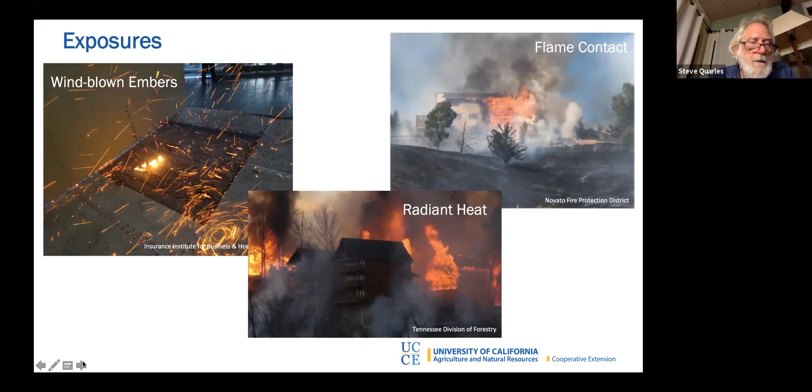They're important because of what they do directly and what they do indirectly. As Carly indicated, I'm retired from the Insurance Institute for Business and Home Safety, and I worked for 8 years or so at the research center in Richburg, South Carolina. So a lot of what I learned is from that experience, and a lot of my visuals are from there. This is one example.

The upper left-hand picture is from the research center, from the test chamber. It's a large wind tunnel facility. You can put full-size buildings in it. IBHS conducts research on the built environment to better understand the impact of natural hazards that have a wind component to it. So it's a large wind tunnel: hurricane, hail, wind-driven rain, and wildfire.

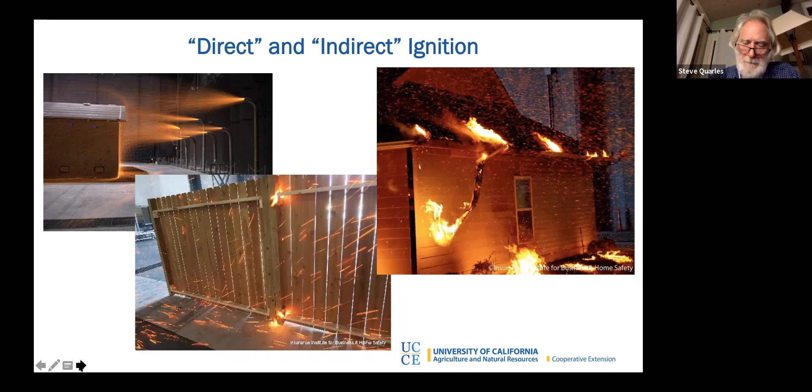I think we've come to learn over the years that homes and buildings survive wildfire most successfully if a coupled approach is taken. The coupled approach means that you take care of things on the property and you take care of things on the home itself.

But you can imagine that if all of that greenery were not there at all, sort of perfect in a manner of speaking from a lack of combustible things, embers can fly over. Embers can fly upwards half a mile, reported much more than a mile. But to have enough embers and enough embers of a given size and energy, you're talking half a mile or a quarter mile anyway, bigger than the property of most people that I know. So embers can land on or near the home, and that home still has to resist the embers.

So there's a lot of ember concerns for the home, and the purpose of what you do on the property is called creating your defensible space. It's also called the home ignition zone. There's a lot of things it's called, but really it's how you select, locate, and maintain vegetation and other combustibles on the property. Other combustibles would be a tool shed, a wood pile, your RV, anything that can burn. You want to make sure that should those ignite, they're not going to have a negative impact on your home.

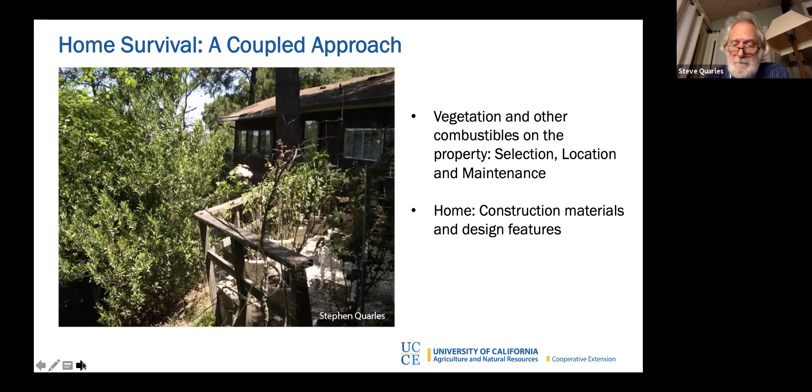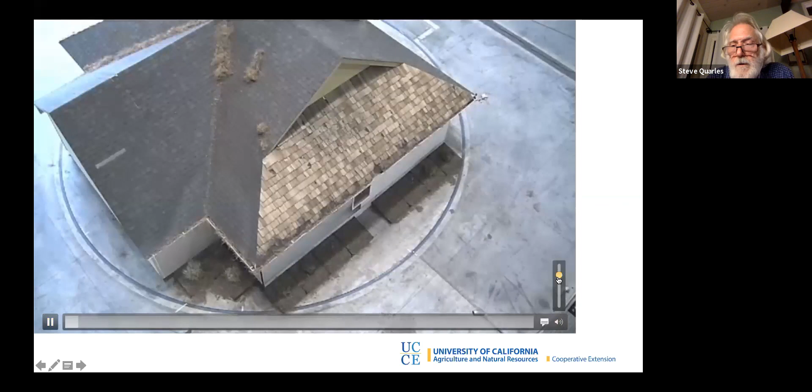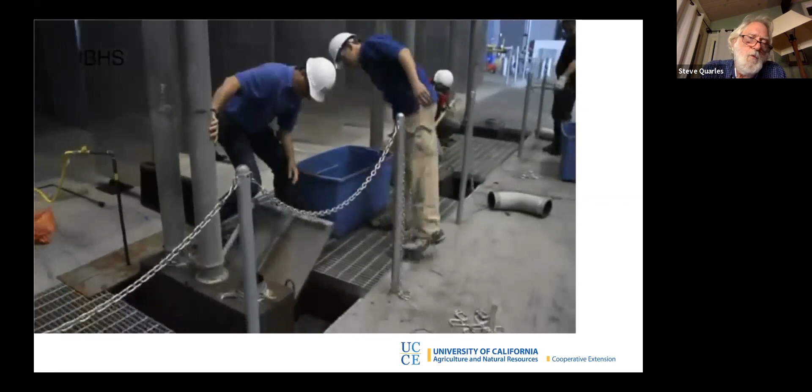So this coupled approach, I think, is pretty important. I'm going to show you a quick video, make sure to take the sound down. This was a 2011 demonstration using our first generation ember generators. It was rather a batch process. We now have more continuous feed generators, so they can run for much longer.

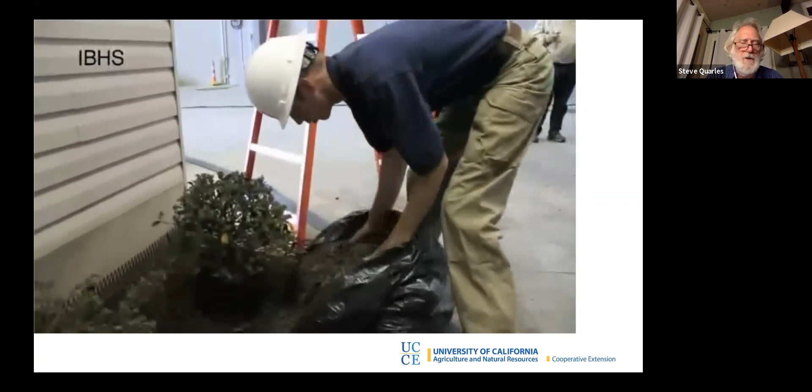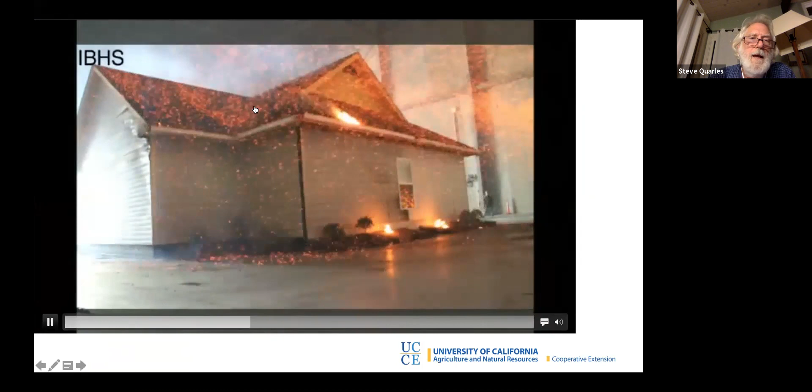In this particular test, we are using common construction materials and common things that might be located near the home. Here's the generators working. You can see embers accumulating on the screen on this window. You're going to start seeing ignition of bark mulch on the ground, pine needle debris in the gutter, and there will be ignition of debris in the valley.

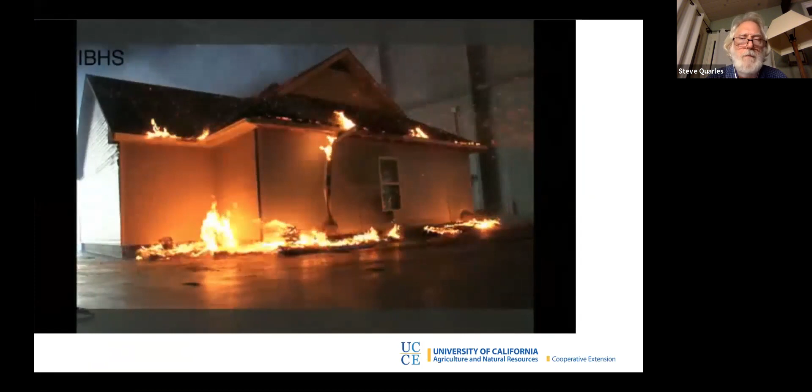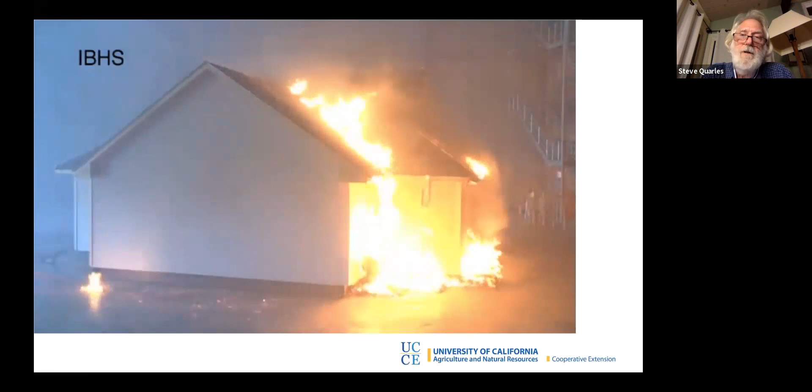You can see the vinyl gutter detaching and falling to the ground, sort of becoming a what's-on-the-ground problem. The metal gutter that was on the right-hand side stays put, and it remains an edge-of-roof vulnerability or threat. You can see the debris in the valley burning.

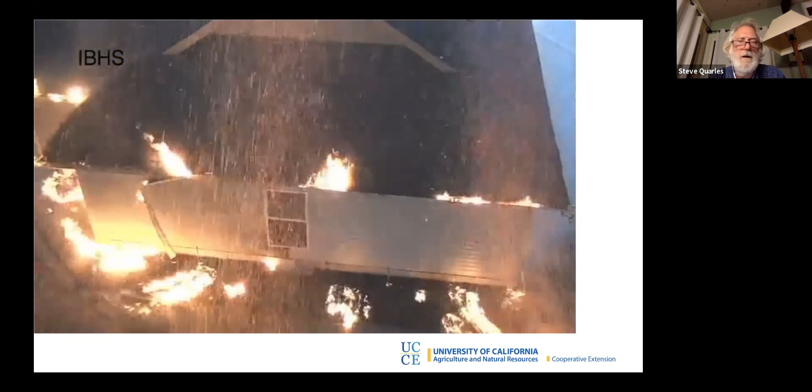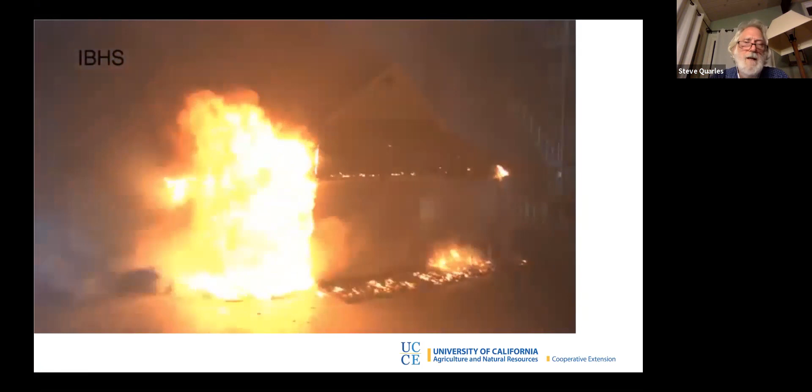Again, another shot of the detached vinyl gutter. The re-entrant corner got a pretty big fire going there. That's what made us extinguish this particular fire — we wanted to maintain and save the house.

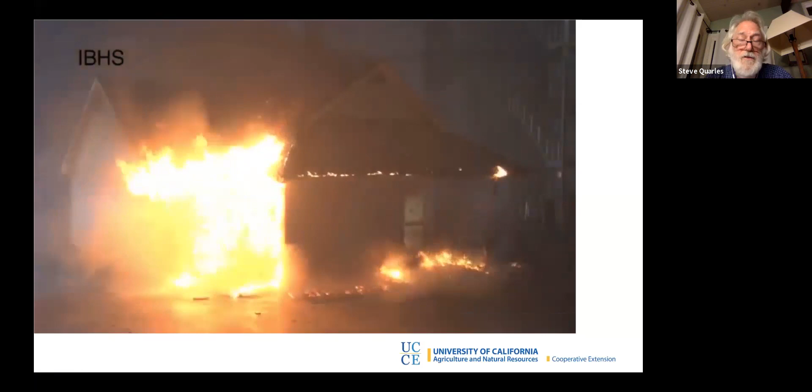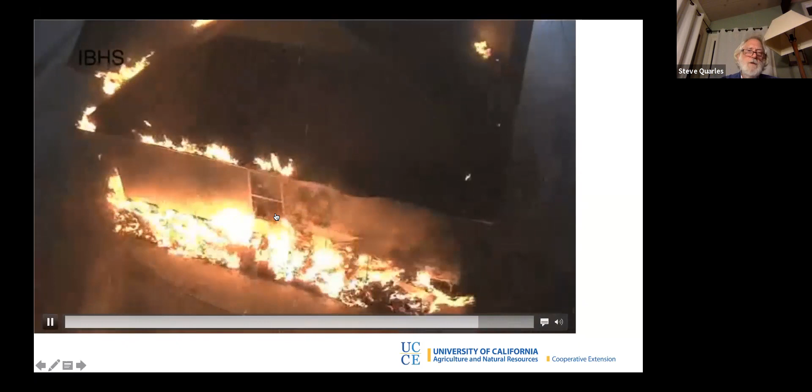But in any event, you see what embers do, and you saw a lot of examples of indirect ember ignition. You can see this is a plastic-clad fiberglass screen in the window. It really did a good job of keeping embers out of the interior of the building.

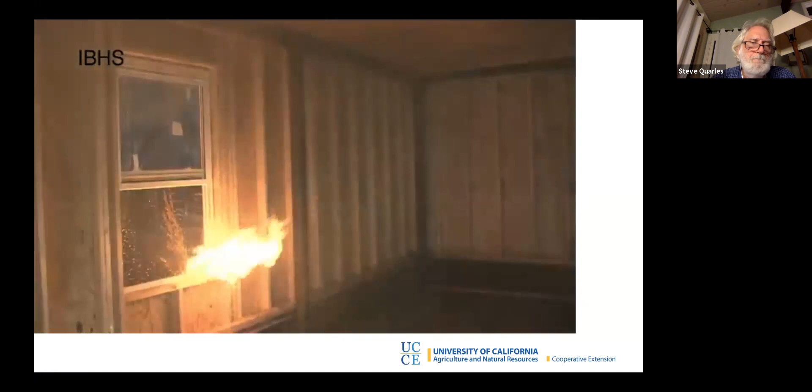We left the window open on purpose, but once flames touched this window screen, the screen failed and flames and embers could then enter. So you saw some examples there of what embers can do.

I'm not going to spend a lot of time on this defensible space component, except to talk about this ember-resistant zone, this near-home zone. You've maybe heard it called the non-combustible zone, the low combustible zone, the ember-resistant zone, zone 0 — Firewise calls it the immediate zone. It's the zone right next to the house, nominally a 5-foot zone, and it includes under the footprint of any attached deck.

The idea here is that because of the importance of the ember and the ability of windblown embers to fly over any defensible space or any property that most people have control over, you minimize the opportunity for embers to ignite the home if you have non-combustible areas right next to the home.

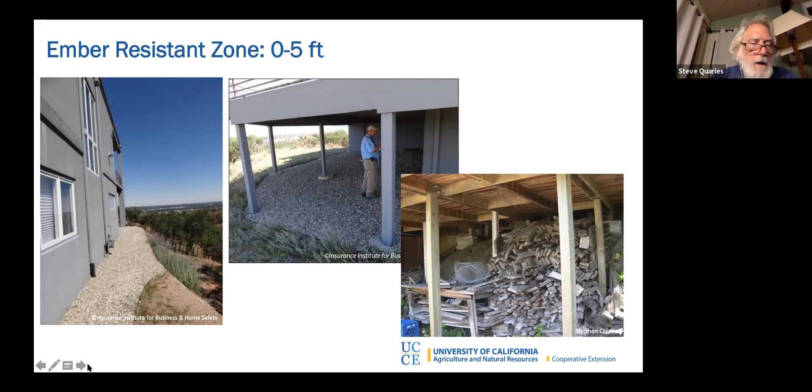In part and parcel with this horizontal zone next to the house, we need to make sure we have this vertical zone between the ground and the start of the siding. You want an area so that embers that land and stay put at this ground-to-exterior-wall intersection don't have anything to ignite there.

We recommend 6 inches because it's a more conservative number, and it allows for a certain amount of combustibles to accumulate there, or some ground cover in proximity. So the 6 inches is the guidance, but if it's only worrying about embers, less than that works—but we have to realize there are sometimes other things that can accumulate there over time.

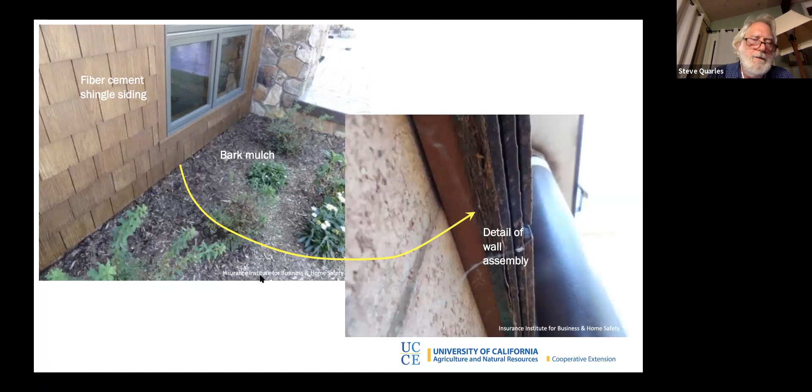There are times when radiant heat or flame contact is definitely more important—these are neighborhoods with close home-to-home spacing. A good example of this was the Tubbs Fire in Coffey Park, Santa Rosa, 2017. The amount of loss from this was in large part from home-to-home radiant heat or flame contact, because the high winds pushed burning buildings into adjacent buildings. So these are examples where materials are much more important.

Often... I lost my train of thought there. We'll just move on.

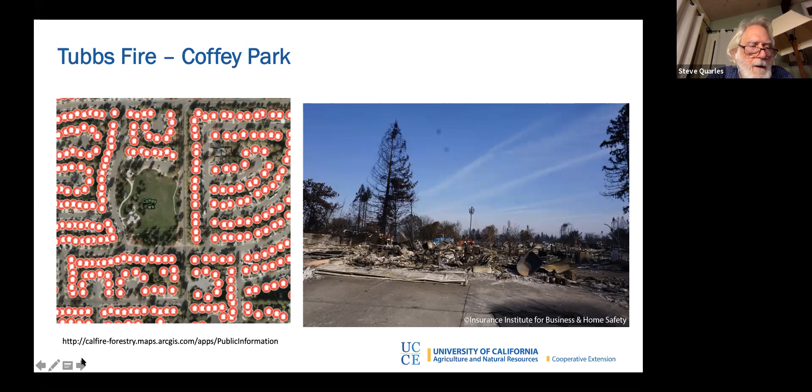This is often an issue when neighboring homes are nearby. We'll talk about some of the things we can do for this during the course of this presentation.

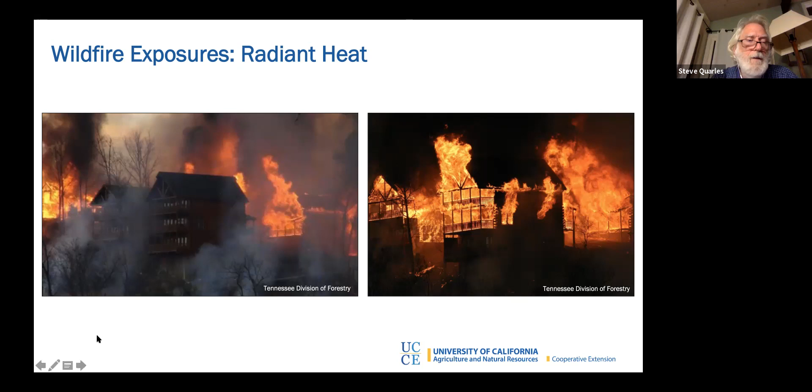When you think about homes you might be designing or building, it's useful to think about where the home is on the parcel and what's near it. If you're building on a large lot, it's all about the ember, as long as you have really good defensible space and can take steps so fire can't burn to the building, or the burning thing isn't close enough that radiant heat from it is sufficient to break glass in the window, for example.

If you're on a steep slope, then vegetation management becomes a pretty important thing. Downslope, you might want to do things to harden your deck or make it more resistant. We could talk about some of those things along the way.

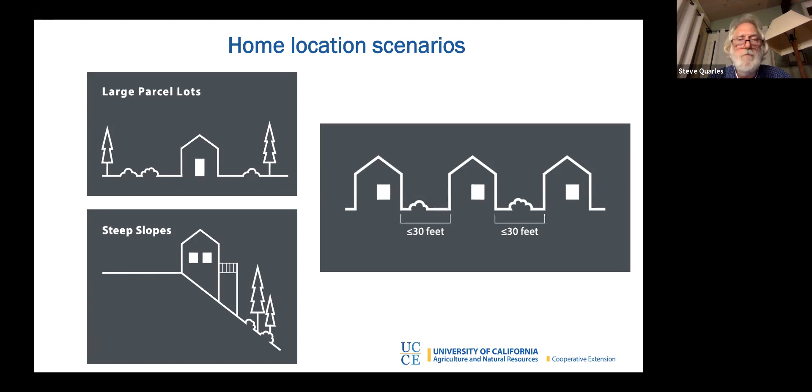If you're in a neighborhood where the neighboring home is pretty close, say within 30 or so feet, then non-combustible cladding is important, and dual pane tempered glass becomes much more important. You can also consider things like a deployable shutter for the window, or a fancier flame and ember resistant vent. So depending on your situation, you can think about how to use different strategies to provide additional protection for the home you're working on.

So I think we're going to take just a few minutes now to review some of the terms used to describe the fire performance of a material or a wall. We have non-combustible materials—there's a standard test for that—which are things that don't readily ignite. And then we have a lot of combustible things.

When we're talking about combustible things, there are different terms or tests used to describe their performance. There's the flame spread index, class A, B, or C. There's ignition-resistant material, which is about the material versus the construction—construction being more of a generic term. I'll show you some pictures of these tests in a minute.

There are some standard test methods that California has adopted through the State Fire Marshal's Office. Most of these are now State Fire Marshal standards, and many of them are ASTM standards also. These are ways that combustible materials can comply in the state.

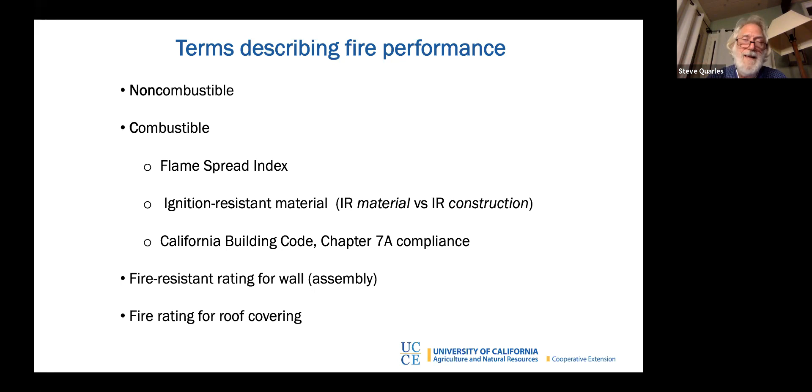Then there's fire resistant ratings for walls—like the 60-minute wall, the 20-minute window—with a particular test for that. And of course there's the roof fire rating for roof coverings, class A, B, or C again. So there's class A, B, or C for roofs, and class A, B, or C for flame spread—two different kinds of class A, B, and C. You just have to know which one you're talking about.

This is the Steiner tunnel, used in two ASTM tests. ASTM E84 is used to get the flame spread index. In this case, the material is located on top of the tunnel, and you monitor flame spread down the tunnel on the material. Depending on how far it goes, you get a flame spread index of A, B, or C, with A being the best. This test is 10 minutes long.

A 30-minute long test is used in ASTM E2768, which is used for the designation of an ignition-resistant material. It also has a prescribed distance down the tunnel that cannot be exceeded to still have that class A or ignition-resistant material designation. So the Steiner tunnel is used for two things: flame spread index and ignition-resistant material.

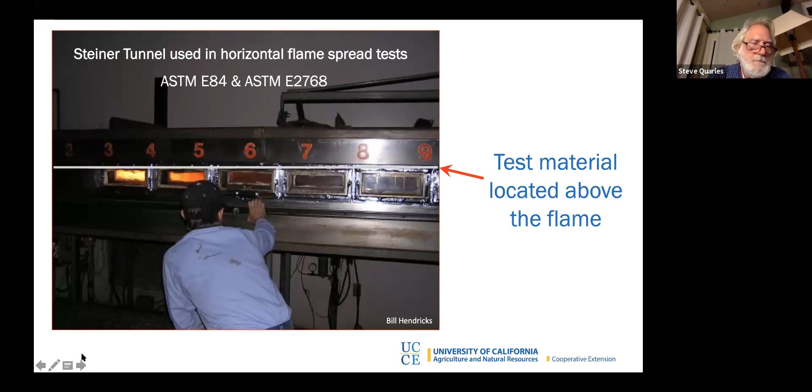If you want to know materials that comply with the state, you can go to the State Fire Marshal's Building Materials Listing Program. You'll come to a page like this and fill in the category you're interested in. I've picked, on the right-hand side, decking for wildland urban interface—decking products that comply with the state's test. You hit search and find products that comply.

You can do this for decking, for siding, for things that comply with the ignition-resistant material designation. That same test we saw before—in California Chapter 7A allows those materials to be used, so you can find out what works there. They also have a listing for vents that comply with their flame and ember resistant criteria.

The best way to get here is to do a web search: California Office of the State Fire Marshal Building Materials Listing Program. It'll be the first or second result in your search engine. It's a really convoluted URL, but that'll get you there.

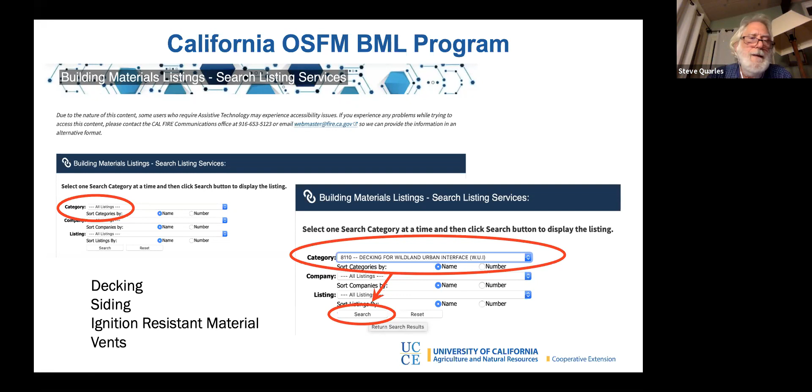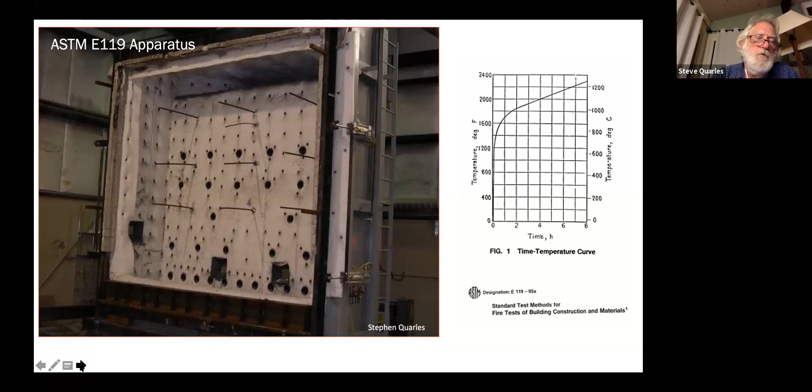If you've read the building codes, one half of the exterior part of a 1-hour wall is one way siding components can comply. This can be a horizontal furnace for floors, or for WUI, wildfire-related testing, but we are mostly interested in the wall part, this particular vertical furnace.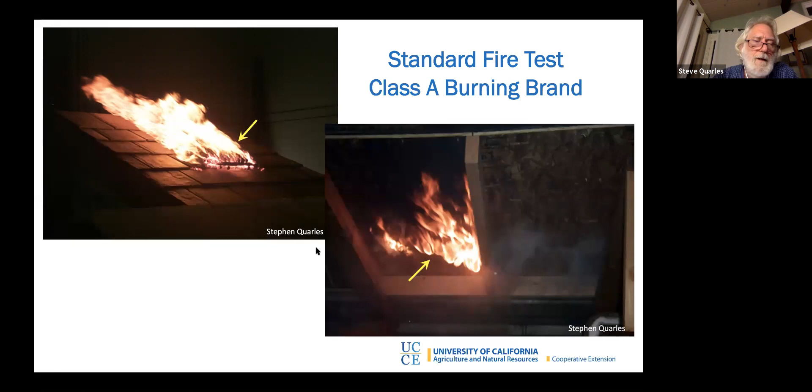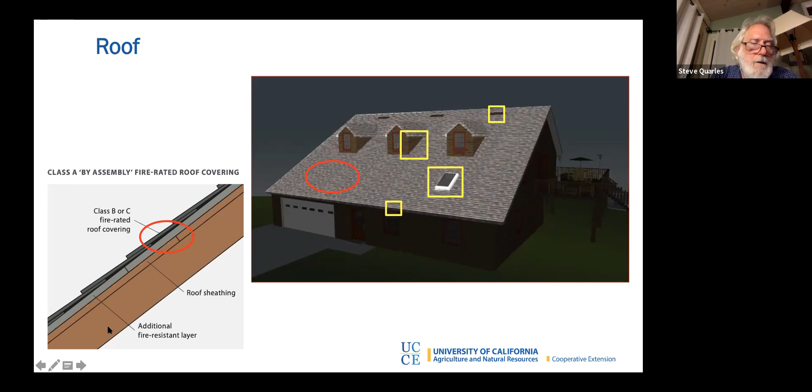The roof can be vulnerable at roof-to-other-component edges - at a dormer, a split level, a skylight, a vent, a gutter. The fire rating of the roof doesn't tell you about these things, about how the roof might perform there. So we're going to talk a little bit about that in the next minute or two.

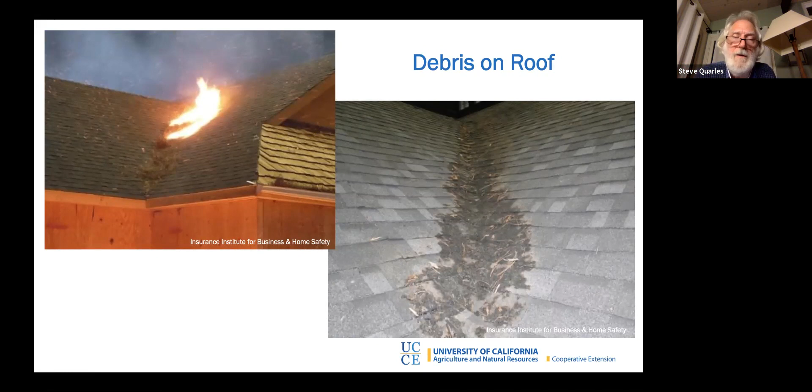In this situation, you have the siding that could be more vulnerable and this under-eave area that could also be vulnerable. You want to make sure both provide similar protection so the siding doesn't become the more vulnerable component. You probably know that at a roof to wall junction, siding can come pretty close to the roofing material because of what embers can do directly.

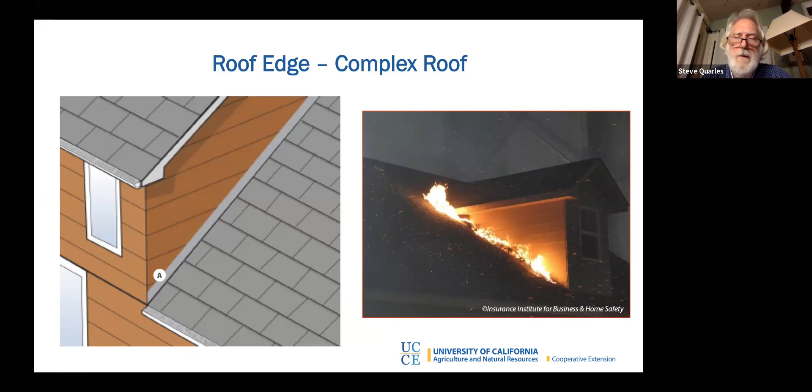It's a good idea to have a bigger separation between the roof and the start of the siding. You can do that by taking the siding off and/or using metal flashing. With this metal flashing detail, to avoid moisture-related degradation, you need to make sure the flashing tucks in behind the siding so water cascading down the wall goes over the top of the flashing and then off the roof. You don't want water to get in between the flashing and the siding, as that would result in moisture degradation problems you don't want.

I think this was a good idea. You can use any number of products, and non-combustible is probably better. You can use something like a mineral wool batt insulation product and stuff it in here. The idea is to plug these openings at the edge of the roof.

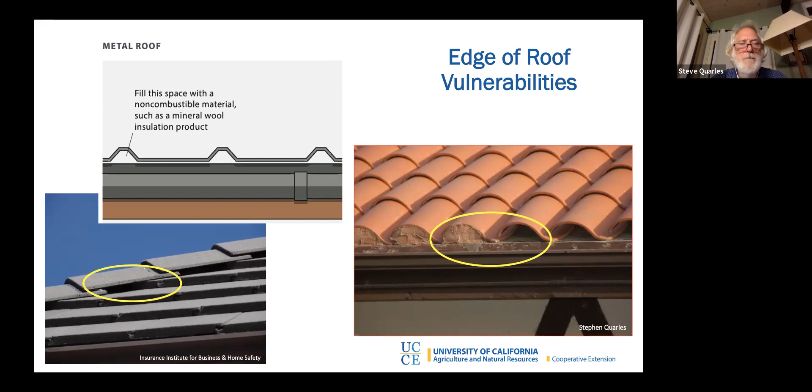So here's a gutter issue. Guidance right now and code in California is to have a gutter cover, and it's always better to have a non-combustible gutter cover. That gutter cover should be linked to a metal drip edge. This does a really good job of protecting the combustible components at the edge of the roof, at the drip edge, and the gutter cover should do a good job of keeping debris out of the gutter.

If you walk around and look, you'll note that some gutter covers just force debris to accumulate on top of the roof and back of the gutter cover. So from a homeowner perspective, it's not a maintenance-free scenario, but it should be a reduced maintenance job. I'd argue that a Class A fire-rated roof covering is in a much better position to resist debris that might ignite from embers on the roof itself, as opposed to in the gutter where flames impinge on the edge of the roof.

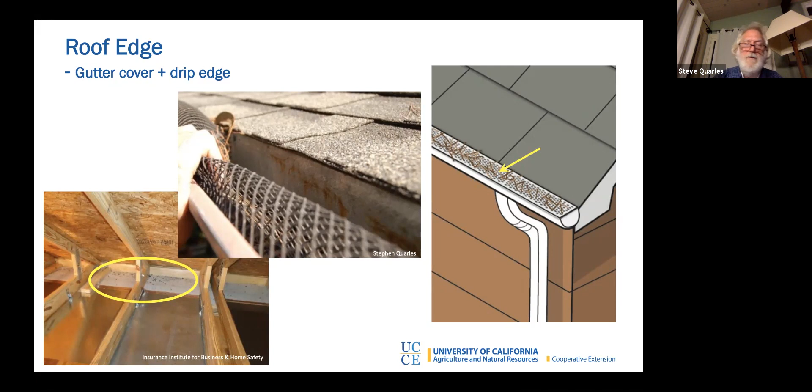The reason for having a non-combustible gutter cover is, as we see in this right-hand picture, debris can accumulate on top of the gutter cover. You don't want that to be a combustible material, so you want that gutter cover to be non-combustible. There are a number of options on the market these days.

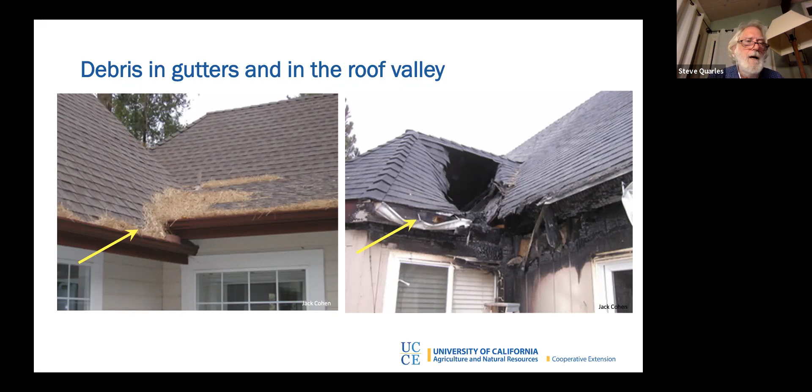So reasons for gutter cover and a drip edge.

If you have an operable or open skylight that opens, you'll have some screening in there. Guidance to the homeowner is to close windows when they evacuate, and the same would apply to an operable skylight. Make sure it's closed when evacuation occurs.

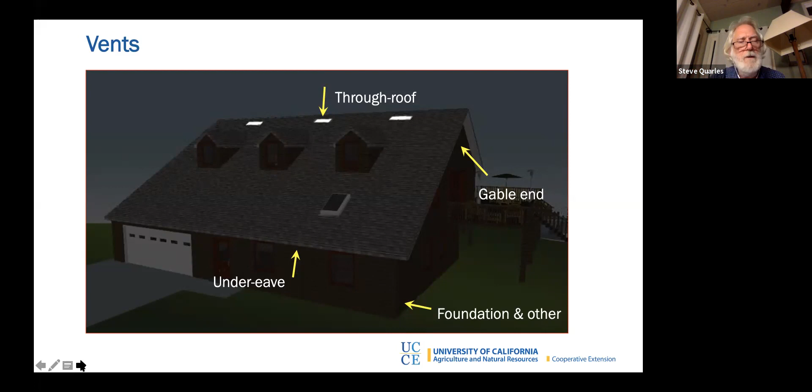The thing is, it's these finer fuels that are more readily ignited - it could be sawdust, it could be bird's nests, I've seen bird's nests in attics, it can be cardboard boxes of things. So we need to worry about these items, and we're going to talk about what vents are more or less vulnerable. What was very clear is that the gable end vent and the venting in open eave construction, vents that present a face perpendicular to the flow of air, are very vulnerable to the entry of embers into the attic space.

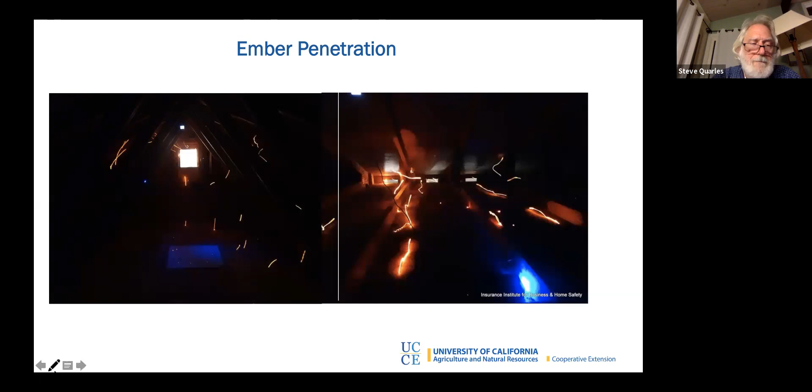So I'm going to show a quick video here and set it up a little bit. This is a camera inside the attic space looking across at the entry of embers into a gable end vent. You can see everything coming in. I'm using this to show you how mesh size can influence the number and size of embers that can enter. So let's just play this.

With 1/4 inch mesh, you can see embers coming in, passing from left to right. The number is large. The ember size has to be smaller than 1/4 inch because otherwise it'll just burn on the outside of the screen until it burns down to that size and then enters.

We're going to watch 1/4 inch for a little bit, and then we're going to watch 1/8 inch. Here's 1/8 inch - you'll notice that the number is reduced, and importantly, the size is reduced. But still, you have a chunk of them coming, and you would need more of them, maybe, in order to ignite something in there.

Attics are usually hot and dry places, so things in the attic become dry. Here we have 1/16 inch mesh, so even smaller openings, arguably fewer embers get through. You can see embers accumulating on the outside mesh, and they're going to burn down and then come in once they reach a size that allows them to enter.

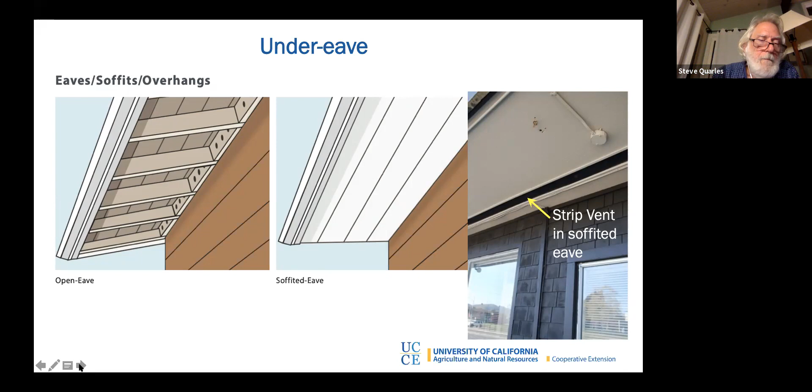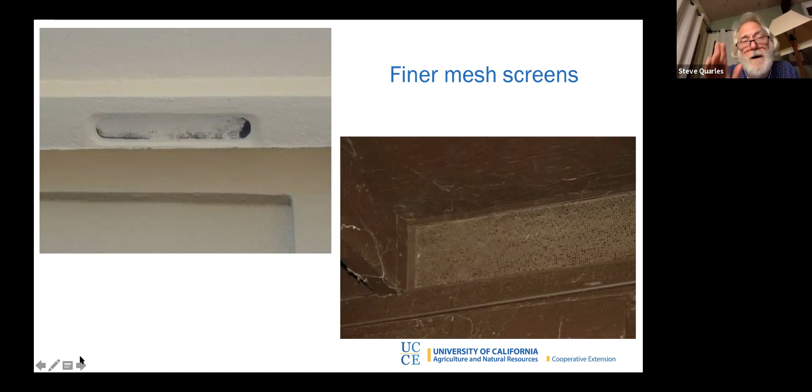So you have to be careful about this. The right-hand picture is an 1/8 inch mesh screen, which over time is easy to gunk over. This is just an awareness that the homeowner needs to have. From a wildfire perspective, you really want to go with finer mesh screen, but the homeowner needs to be ready to do a little bit more maintenance. You can also notice that this screen in the upper left needs repair because it's really detached, so it's not doing a job at all in keeping embers out or even small rodents out.

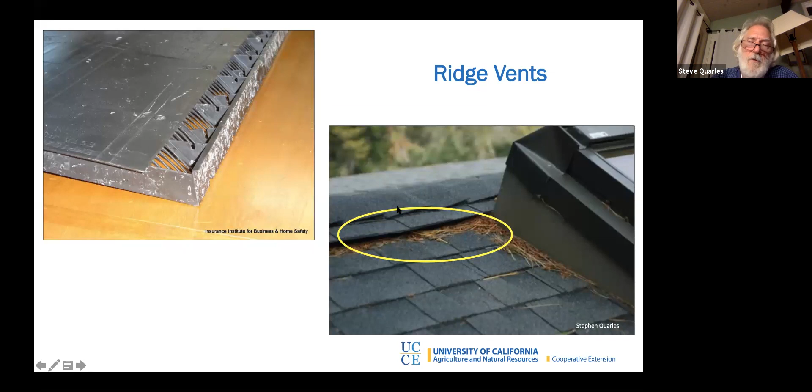We found that if you have a ridge vent, this exterior baffle does a really good job of minimizing the entry of embers. It's plastic, so it's not really a good thing to have on the roof, and we see the example of why not in this lower right-hand picture. Debris will accumulate at the entrance, embers will ignite, and then you have flaming exposure to this plastic vent. There are metal ridge vents that have this exterior, external baffle. This was a good performer from an ember exclusion perspective, but because of this debris accumulation potential, if you want to go the route of a ridge vent, you should go the route of a metal one, a non-combustible one.

There are a number of flame and ember resistant vents that are approved by the state of California. There's an ASTM standard test method that these vents must comply with, and you can go to that building materials listing page on the State Fire Marshal's website to see which vents currently comply. There are four vents that are currently commercially available in the state.

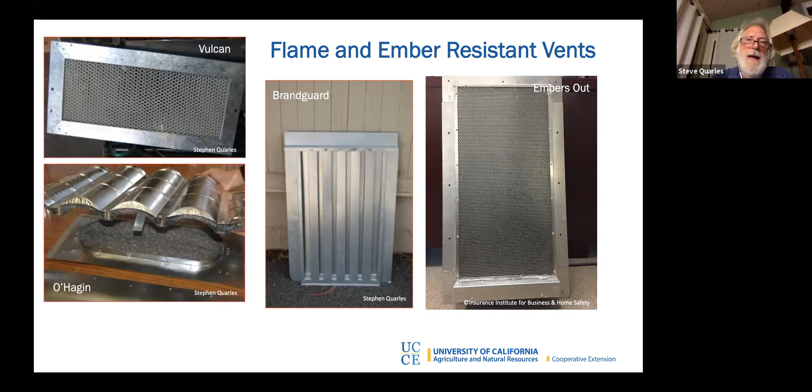These are the options that are there. These are far more expensive than 1/8 inch mesh screening, so this is something you'll need to evaluate. But there are certain situations where flame and ember resistant vents are really useful.

There are also unvented designs out there, and you get around the need for a vent altogether. You can do this for a crawl space or for an attic space. You need to check with the local jurisdiction to make sure they're copacetic with an unvented design, but this is definitely an option.

It's easier, I think, to do with new construction. If you're retrofitting existing, there's a lot of penetrations that might be hard to get to between the living space and the attic space, for example. That might allow moisture to get into the attic space with no way to get out. So if you're doing a retrofit, you need to be pretty careful. And because of ice damming issues, sometimes you have a harder time getting approval or using this kind of design in colder climates.

But it is an option. You want to make sure that the roof covering you have isn't going to be negatively influenced by having the foam so close to the roof covering. When you go to this unvented design, you're moving the thermal barrier from the ceiling to the roof, or in this case, to the under roof area. And so that foam insulation that is good for air barrier purposes, you don't really want it to have a negative impact on the fire performance of the roof.

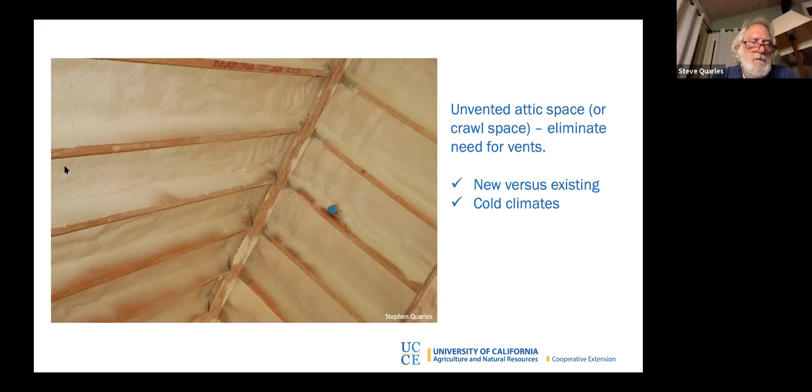The California way to comply with that state fire marshal standard and the ASTM accompanying standard, it's strictly a fire penetration standard or compliance pathway. You can have a lot of flame spread on the wall as long as fire doesn't penetrate through a lap joint. You can be good to go. So this is something to be aware of.

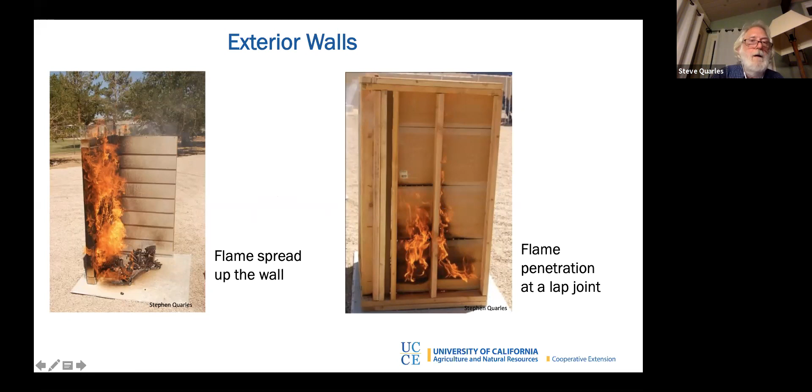This applies only to combustible cladding. I think that fiber cement often uses a plain bevel lap joint design. And this vulnerability of the lap joint doesn't really apply to a fiber cement product. It resists the penetration at the lap joint pretty well.

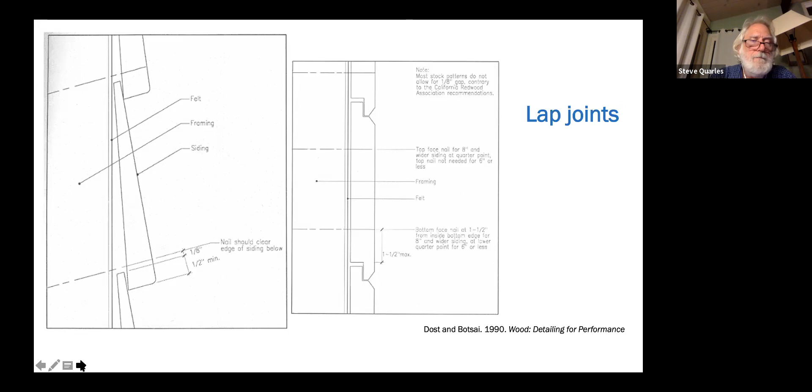A lot of us, I think, people tend to think that good siding is the only thing you really need to have. And whereas there are definitely situations where non-combustible siding is really beneficial, we talked about some of those situations earlier, but as you can see here, it isn't everything.

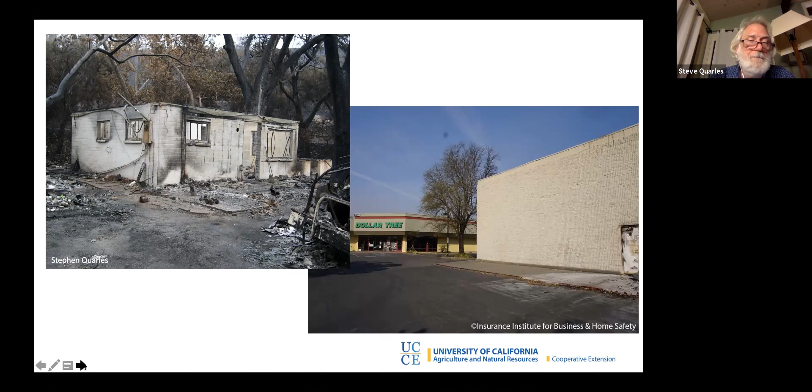So sometimes the glass broke. They did this test a few times, and sometimes the glass broke, sometimes not. But in each case, it was a single pane, non-tempered window.

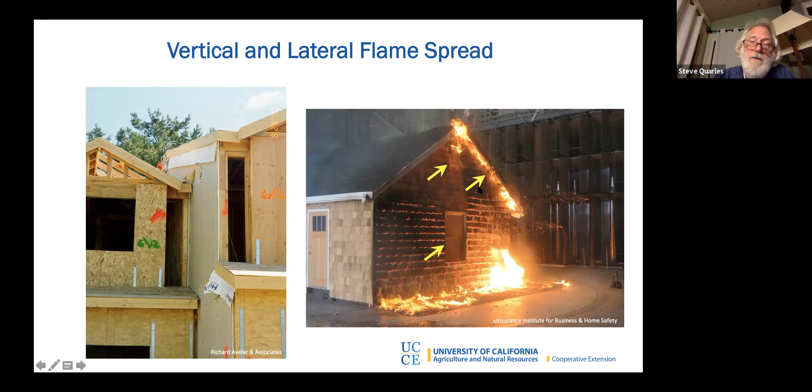I think the thing is that when siding ignites, this is another reason for this non-combustible zone, or near non-combustible zone, near the home. Because when siding ignites, it just becomes a problem for the home, and it's really difficult to have that home survive, just because there are so many potential weak links that you need to address. Whether or not fire penetrates at the siding itself, you have these other things that can be weak links.

This is just a study that I did with some colleagues several years ago when I was with the University of California. It shows that in addition to open eave construction being more vulnerable to ember entry, because of this boxed-in feature you have with blocking and blocking joist roof sheathing cavities that are built, you have much faster ignition and much quicker lateral flame spread with an open eave design compared to a soffited eave design.

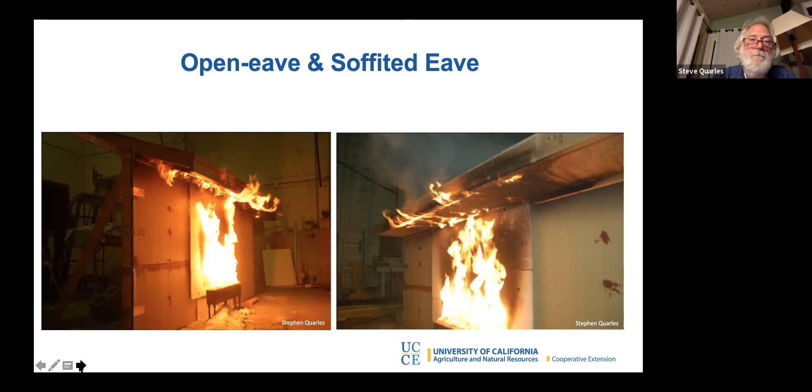So there's a couple of reasons to opt for soffited eave, but really you need to be doing what you can to stop that wall from igniting at all, because of what we've just been talking about. So we did talk a little bit about this with the question earlier in terms of coating.

This was a spray-on coating for a roof, a wood-shake roof, but I think it applies to other kinds of paint coatings also, the question. Often these are intumescent coatings, coatings that when they get hot, either from radiant heat or flame contact, swell up and become an insulating layer. This is used in the Vulcan vent and in some of the Brandguard vents.

There's a lot of interest, I think, in using these kinds of coatings on combustible siding. And arguably it would be a cheap, inexpensive strategy, if it worked. So at IBHS, when I was there, we did a study in collaboration with the University of North Carolina at Charlotte, and we found that they don't work.

We picked only coating products that marketed themselves as being good for 5 years, and within a year they were performing no better than uncoated wood. NIST, the National Institute of Standards and Technology, did a study also recently and basically confirmed what we found. So that's one reason.

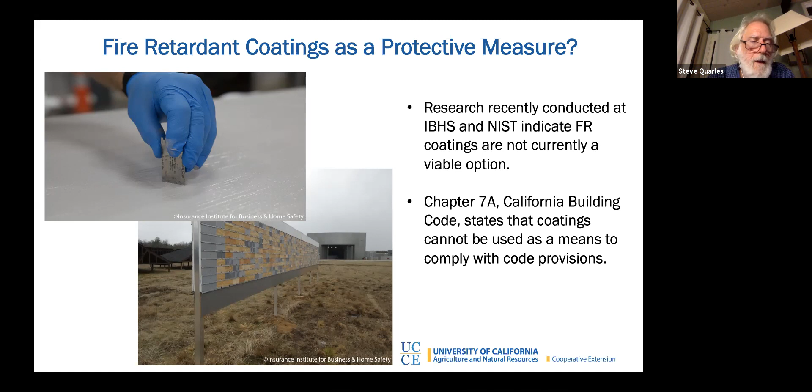Okay, so spend a couple minutes on windows. There's a couple ways windows can be vulnerable. One is that glass breaks and flames or embers enter. The other is that the frame ignites and then fire enters that way.

A lot of tests have been done on windows, and it's pretty clear that the most vulnerable part of the window is the glass. That's why Chapter 7A and other codes really focus on the glass itself. California requires tempered glass in a multi-pane IGU unit.

You can see in this figure that the glass becomes vulnerable because of the temperature differences between the protected glass, shielded by the frame, and the glass not protected by the frame. These temperature differences cause cracks that propagate inward from the edge. Enough of these cracks propagating inward, and it falls out.

So you have the outer layer protecting the inner layer first, and the exposure has to be long enough to get both panes of glass in this dual pane system. Having tempered glass really just increases that time.

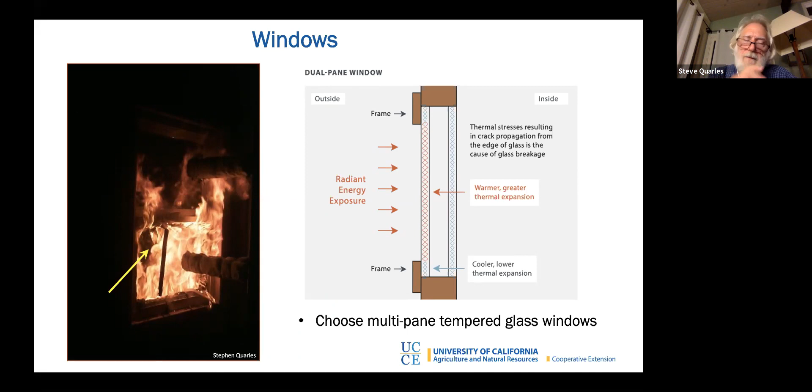There's one gotcha about being indifferent to frame type, and that's with vinyl windows, particularly hung windows. As we see in this picture, you really want the frame at this horizontal meeting rail to have, as shown on the right, metal reinforcement in this meeting rail area.

If not, as we see in this left-hand picture, at radiant heat far less than that required to break the glass, you get deformation of this rail and the IGU unit just falls out at far lower exposures than required to break glass—it falls out and lands on the ground and breaks. So you want to make sure it has this reinforcement area. If it does, you can be indifferent to frame type.

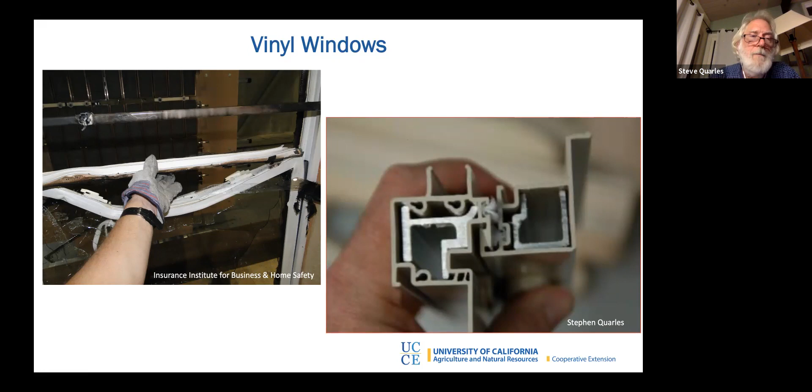If you have an AAMA rated window, it will have this reinforcement in the meeting rail area. Others may also—I happen to know that AAMA rated windows do have that.

There are situations where a shutter would be beneficial to help protect a window—a deployable shutter or something you put on the window when wildfire is threatening. But again, coming back to embers, there are other ways a home can be vulnerable. This is the Southern California fire again—it had a shutter deployed, but the home was destroyed because of other vulnerabilities in the home.

Okay, another stop point for questions.

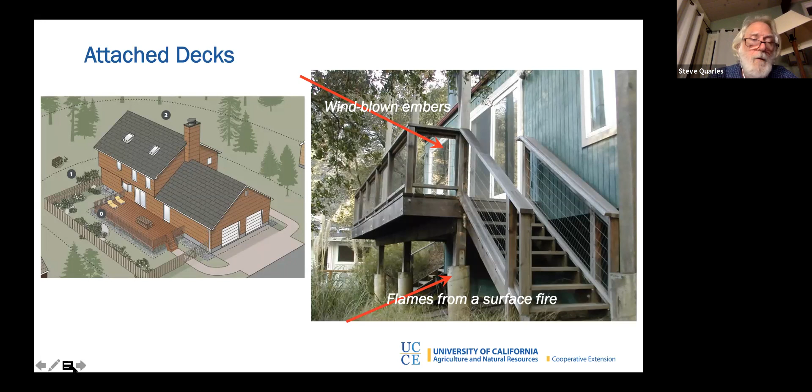This is a pretty cool picture I like. The left-hand picture shows where embers accumulate when you have a pretty smooth surface emanating out from the building or home. They accumulate at the wall-to-ground or wall-to-deck interface, and then there's a stagnation point a few feet beyond that. If you have something in the way, they'll stop there, no doubt about it. But a deck is smooth enough that if there's not a piece of furniture or whatever, it'll come out and stagnate a few feet from the building. It's a function of the height of the building, so 4, 5, 6 feet, depending on the height. The right-hand picture shows embers getting at this wall-to-deck interface.

So you want to make sure that you do things that make this less vulnerable. If you have combustible cladding, you can have a metal flashing that comes around. If you have a wooden deck board deck, you can use a metal deck board option next to the home. We'll talk a little bit more about that in a second.

And then the other place where embers accumulate is in the deck board gaps, and they'll stay put if they happen to land where a joist is. If they land where a joist isn't, it'll fall through the deck board gap onto the ground below. Another reason to have a non-combustible zone under the deck, because embers will land there even if you completely block off the front of the deck. Embers will get there by going through the deck board gaps to the ground below.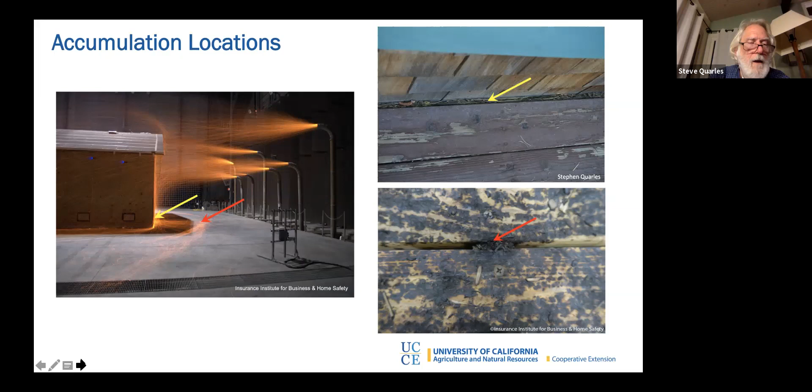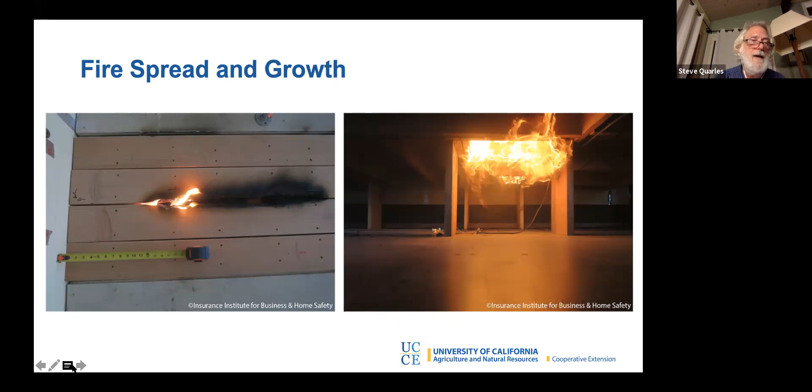This is one of the cooler experiments I did at IBHS, and it really showed that flames can burn to the building as a really tiny flame, and then it's really what's happened when you get to the home in this case. Embers will ignite the deck board between gaps on top of joists, and it'll start burning both directions. In this case, we're burning towards the home, and it will get to the home as a small fire. Fires that get big in a deck start getting big in the underdeck area, as we see on the far right. We'll get to some strategies to fix this. This just shows you that it doesn't necessarily need to be a big fire that gets to the home. And then once it gets to the home, if there's combustible siding there, it can ignite that and the fire will get bigger.

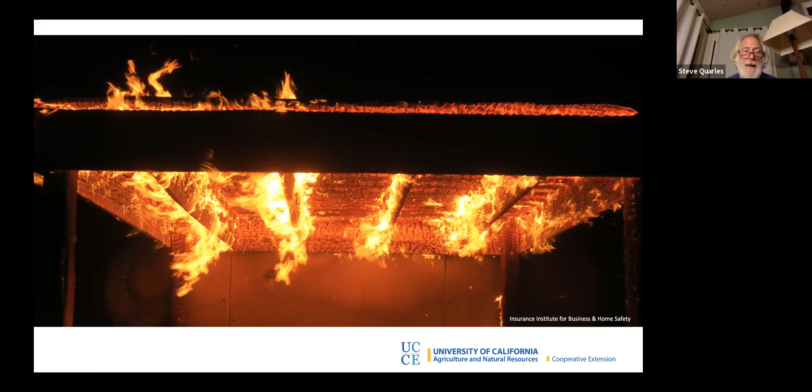The first cost of metal joists are definitely higher than a wood joist, so to avoid that, you really need to do what you can to stop embers and flames from getting into that underdeck area. Here's a picture of what I talked about earlier. You can replace the deck board immediately next to the building with a non-combustible option, whether it be a deck board or a metal grate.

Here's an example of using metal flashing to create a non-combustible vertical and horizontal zone right at the deck. You need to make sure you tuck in or let in the flashing, in this case at a lap joint, so that water coming down won't get between the deck, the siding, and the flashing.

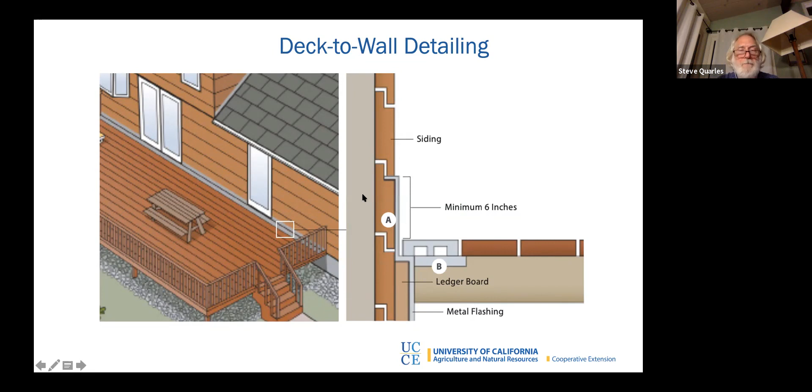Here's another option: make your deck board gap as big as possible. That's good for minimizing propagation of flame that might start in that gap between deck boards. If you're using a wooden joist, use a metal flashing cap, or in this case metal foil-faced bitumen tape. This takes the joist out of the picture and makes it harder for ignited decks to sustain flaming and propagate outward.

So these are a couple of options when you're having a new deck built, or if you want to just retrofit by taking a deck board or two next to the house, you can add this at the same time.

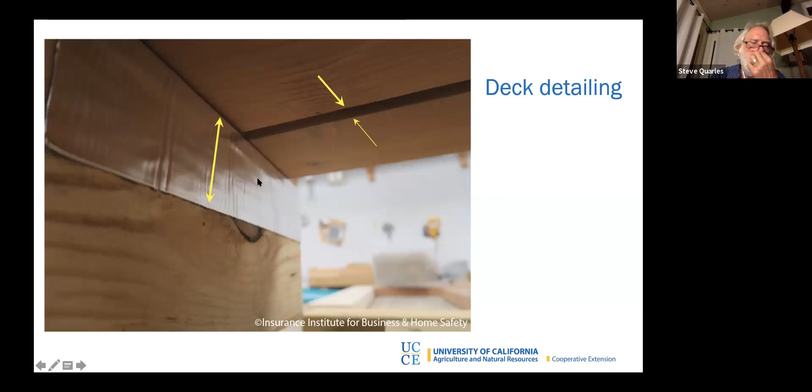Here's a friend of mine who is retrofitting his deck, and he put these metal pieces on top of the joist. When you put the deck board down, that metal piece stays put. He used a metal grate right next to the home.

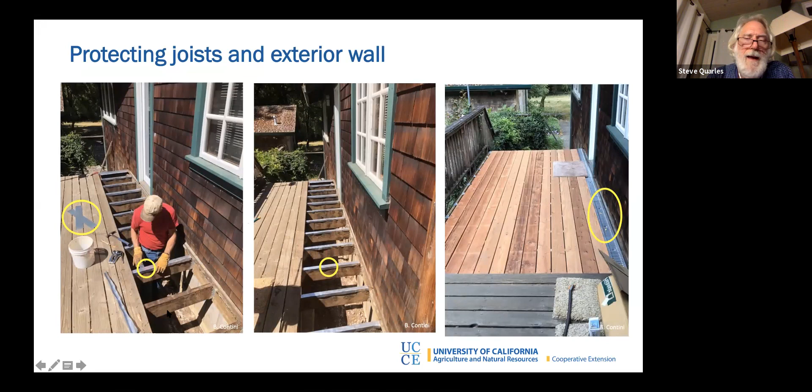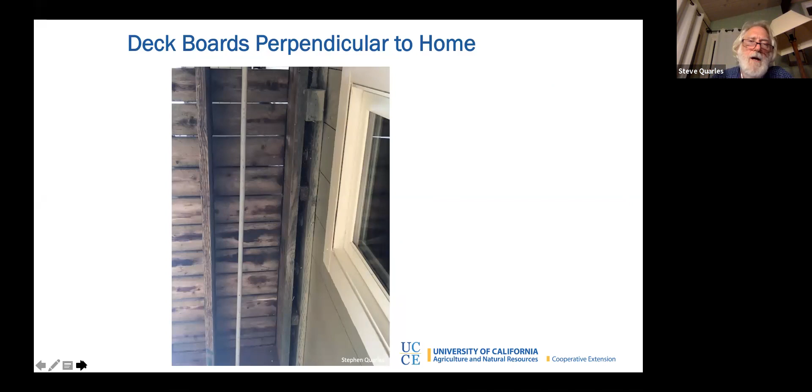This is much easier to do when you have deck boards that are parallel to the home. When deck boards are perpendicular to the home, it's more of a challenge, as you see here. You have to work with the underlying support system to cut those deck boards so they can rest on something, and have the metal deck board be supported also.

A lot of people have questions about deck enclosures. I'm not a huge fan of deck enclosures because they can have moisture degradation implications. Particularly when you have a deck board deck -- but if you have a solid surface deck, like lightweight concrete, enclosing the underside can make perfect sense.

But if you're using deck boards, you're just asking for trouble from a moisture perspective, because water that gets in can't get out. You can have moisture degradation issues, decay of joist members, and corrosion of fasteners, hangers, and the like.

So when you have a horizontal enclosure, you need to make sure you have a solid surface deck along with it. If you have a deck close to the ground, using screening is perfectly fine -- it keeps debris and embers out from that direction. But as we said before, embers can still enter through the deck, between deck board gaps.

So be careful with enclosures in general, and should you have them, just make sure there's a way for that under-deck area to be able to breathe, so that you don't have moisture problems along the way. Because I can pretty much guarantee you that the house will be rained on before it sees a wildfire.

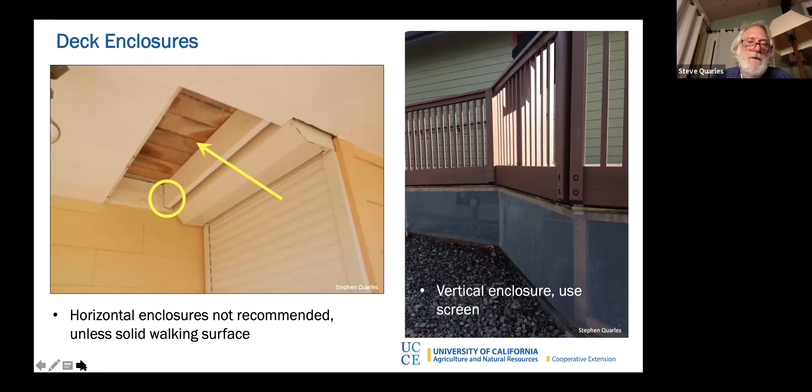Decks overhanging slopes are one area where you might want a solid surface deck and a horizontal enclosure, just because of the potential for flames to get there.

If you have chaparral, whether in California or other places with chaparral or grassland, you could help by putting a non-combustible retaining wall downslope, so fire burning upslope will be deflected by that retaining wall, helping to protect the deck and the home.

But with a forested or wooded situation, you really need to be worrying about thinning the trees so that crowning doesn't occur.

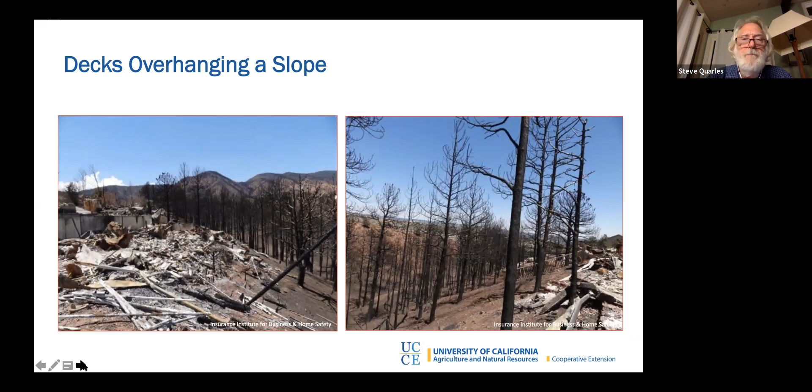Oh sorry, I forgot about this.

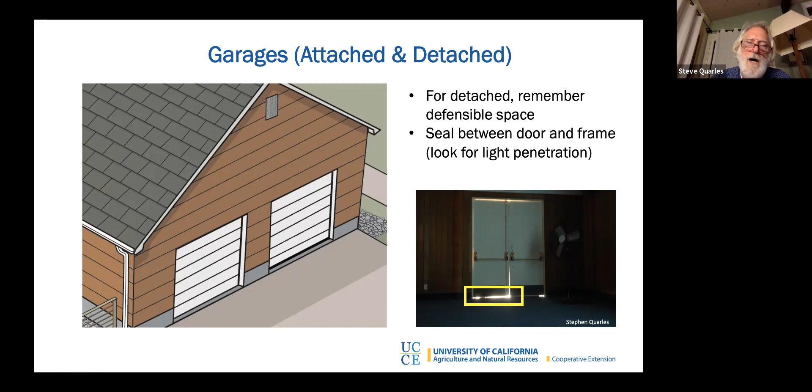The one thing that was also clear is that if you have debris at the base of the fence, that will ignite first, and that's the easiest way for fire to reach the building. It gets there as a backing fire, because wind blowing toward the home recirculates backwards when it hits the building.

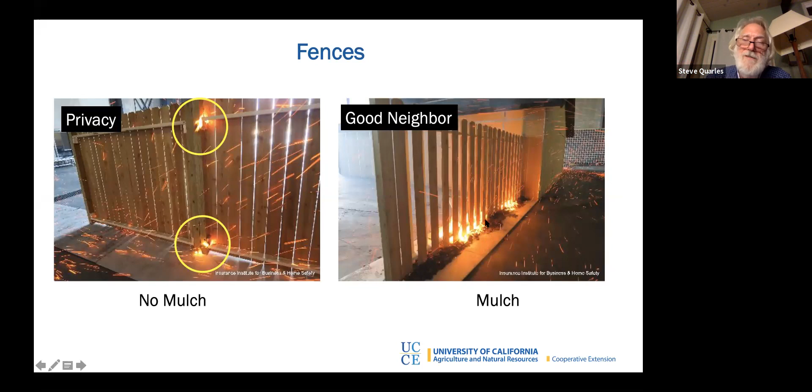So from a guidance perspective, keep debris away from the fence, and do that on a regular basis. If you're designing this for a home, put a non-combustible section near the home, and tell the homeowner: don't let debris build up, it'll just make things worse for you and your fence.

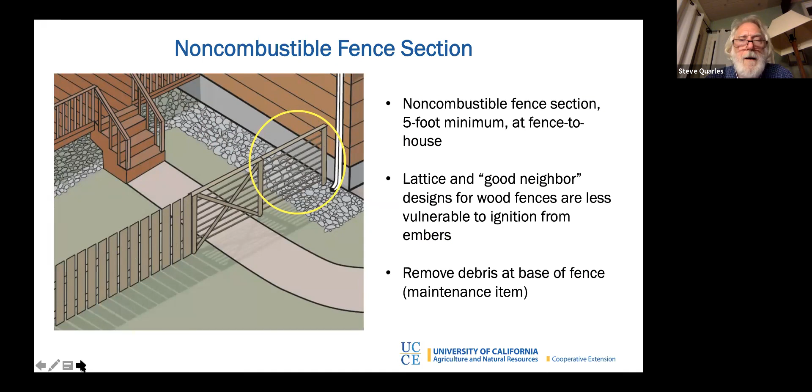I think I'm going to stop sharing, should I start sharing, stop sharing? Or do you want me to keep it on for a minute? You could keep it on while we ask this next question, and then we'll move on to our conclusion and the general Q&A.

Okay, all right, that was so informative, thank you so much Steve. We have one more question here that we have time for related to attachments. Can you talk some more about flammability of composite decking material? Are there some products that are better than others?

Good, thank you. I think the way I answer this question is twofold. One: do you only need to worry about embers? Have you done a really good job creating this non-combustible zone, or nearly so, underneath the deck, so you don't have to worry about flames touching the deck? If that's the case, you only need to worry about embers.

Our research showed that higher density decking materials, including all plastic composite decking materials and higher density wood decking products such as ipe and other tropical hardwoods, are far more resistant to ignition by embers than, say, redwood and cedar, which are more vulnerable by a stretch to ember ignition. So if you only need to worry about embers, and you're building a new deck, higher density products are the way to go.

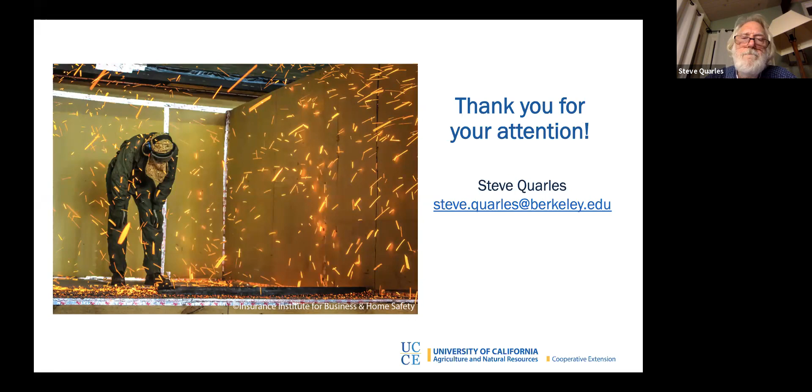I'm going to go ahead and share my screen really quick to go through some concluding thoughts here before we start our general Q&A section. So I'm just going to go over this really briefly. These are just some resources on how you can learn more.

Steve's presentation was so informative. So if you want to learn a little more, these are some resources. We will be sending these out in our follow-up email with links to each of them so that you can learn a bit more.

And then we recommend getting involved. There are so many organizations that you can get involved with that work with wildfire preparedness and specifically home hardening. Look for your local networks like us, the Tahoe Network of Fire Adapted Communities. There's also the Nevada Network of Fire Adapted Communities.

Keep an eye out with your university cooperative extension programs. So you have both University of California Cooperative Extension, the University of Nevada Reno Extension, and I'm sure other universities have extension programs as well that you can get involved with. You can also get in contact with your local fire district. A lot of fire districts work on this type of stuff, and it's always great to be involved with them.

Resource conservation districts as well. Resource conservation districts are all across the country, and specifically in the West, they do often have programs that deal with wildfire. So look at their website, reach out. And then, of course, FireWise USA through the National Fire Protection Association.